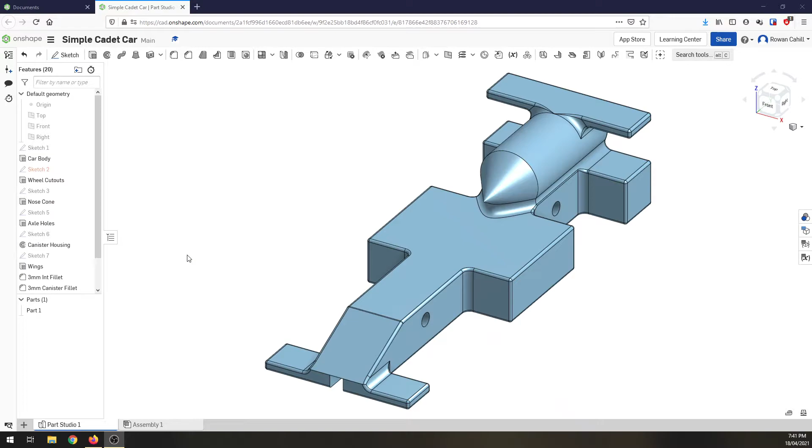So to start, I'm in Onshape, in my F1 in Schools Simple Cadet Car folder, and I'm going to create a new document. Document name, I'm just going to call it Cadet Car. Once it's created, we'll go into our workspace and start creating the car.

Now, with our axes or work planes, we're going to use those and be very careful about which ones we select and when. For this car, I want to start by creating the front profile of the body of the car. So I'm going to click on Sketch and select the front sketch plane.

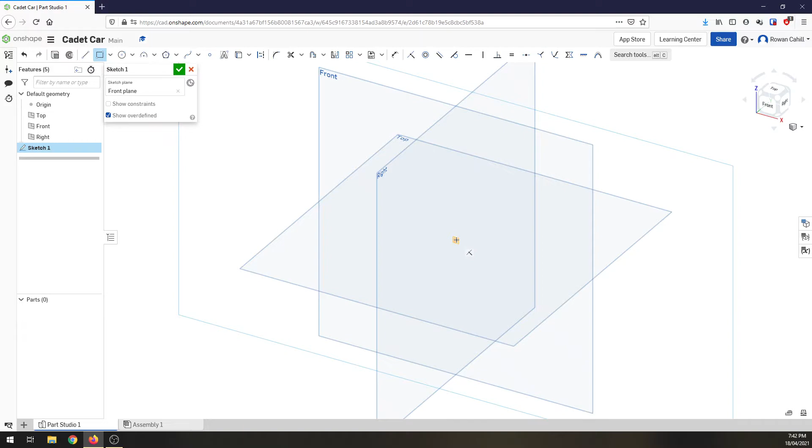To do this, we want to start by drawing a rectangle, and I'm going to wait until my mouse hovers and highlights the origin point of my sketch planes. I'm going to click, come up and to the right hand side, get it about 30 by 20, click, and to dimension it we're going to type in 32.5 along the horizontal and 20 millimeters along the vertical. There's the profile of the body of my car.

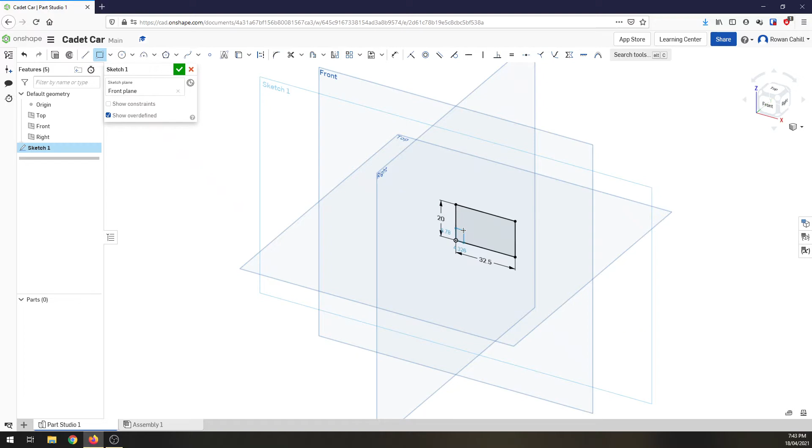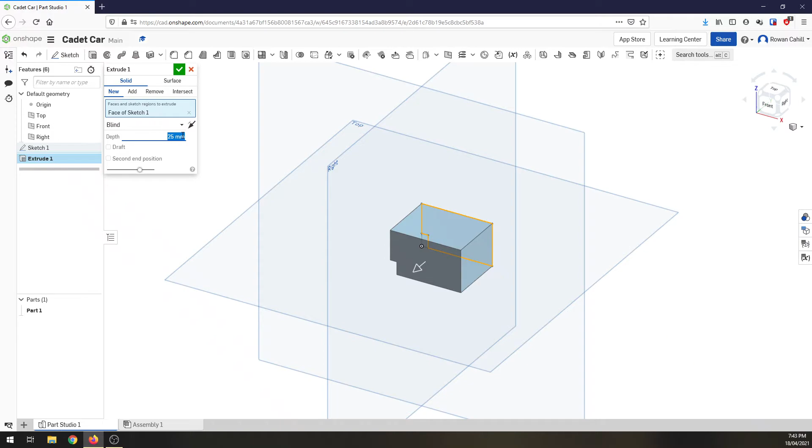I still need to add in the tether line slot. Now I should mention we're working on half the car at a time because we want this car mirrored, so it's got to be the same left and right. So when I create this rectangle for the tether line slot, it's going to be 3 millimeters wide and 6 millimeters high, because once we mirror it, it comes to 6 millimeters. Finish my sketch, and now I'm going to extrude that basic profile. For the length or depth this time, we're going to select 190 millimeters. And there we have the basic body of the car.

Okay, now we've got the basic body. What we're going to do, and this is a great habit to get into, is come over to our features browser on the left hand side. We're going to right click on extrude one, rename it, and call it car body. We're going to name all of the features as we create them, so that in the future if we want to go back and edit it, it's easy to find where the particular feature is that we want to edit. Alright, next one.

We are going to create some cutouts for where the wheels go, on the front. Again, I'm going to come in and hover over until my mouse highlights in the corner. I've created a sketch on this outside plane, and I'm going to come up until it attaches itself to the top edge and click. Down here, I want to type this in as 80 millimeters long. If I've highlighted that top edge, it's already going to say 20, so I'm going to hit enter for that one.

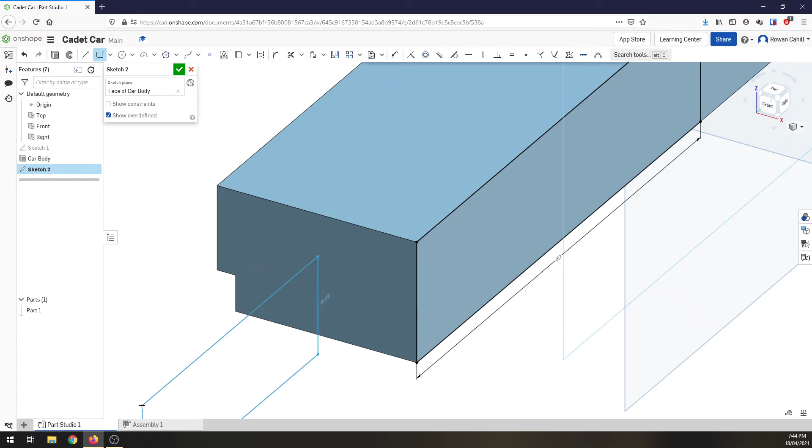Now I'm going to do this again up towards the back of the car. I'm going to select corner rectangle and come in a little bit from the back down till it highlights on the bottom edge. Drag along, doesn't matter. This one's going to be 40 millimeters long, 20 millimeters high. Now we need to add another dimension on this, so I'm going to use my D key to start a dimension, and I want this line to be 20 millimeters from the back edge of the car body. You'll see now that whole rectangle got pushed forwards.

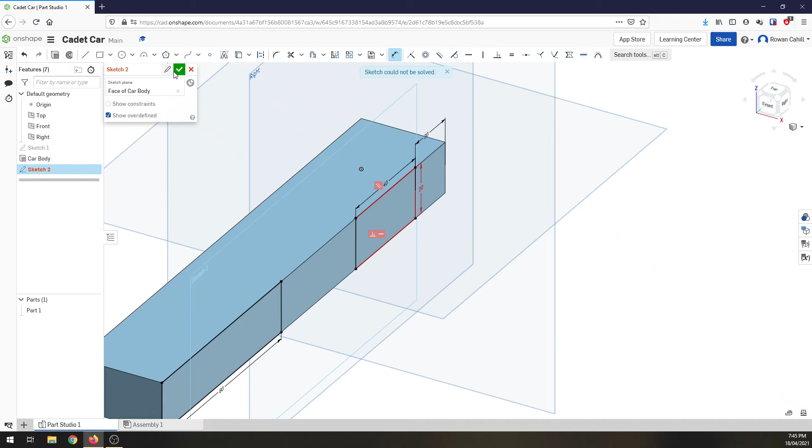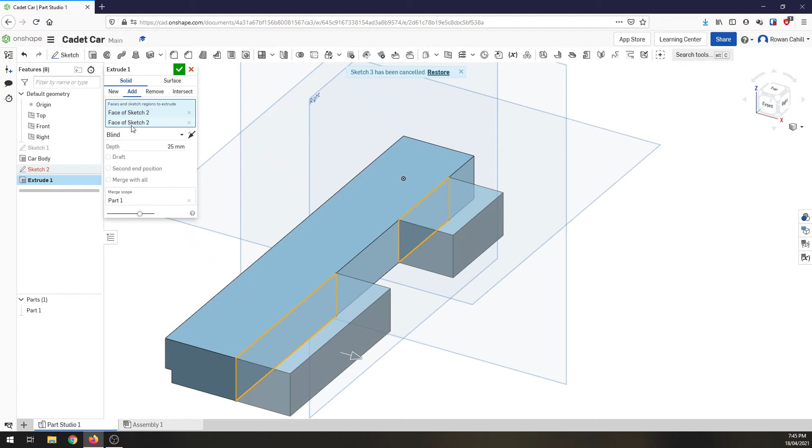I'm going to finish my sketch, and we can now extrude these in to form the cutout. So we want to go extrude, select the front rectangle, the back rectangle. Now you'll notice they're going the wrong way, so in the extrude box we don't want to add anything, we actually want to remove 20 millimeters of material. Click OK, and you notice now we've got these cutouts. Again, come over to our features, right click, rename, and I'm going to call them wheel cutouts. Alright, there's our second major feature being created.

The next feature we want to do, I want to get a nose cone on this. So I'm going to sketch, this time selecting the inside face of the wheel cutout, and I'm going to do a line. I'm going to come a little bit past halfway down the front corner of the car, click, drag up until it reaches that top edge. Again, doesn't really matter where. Front corner, and then back to meet.

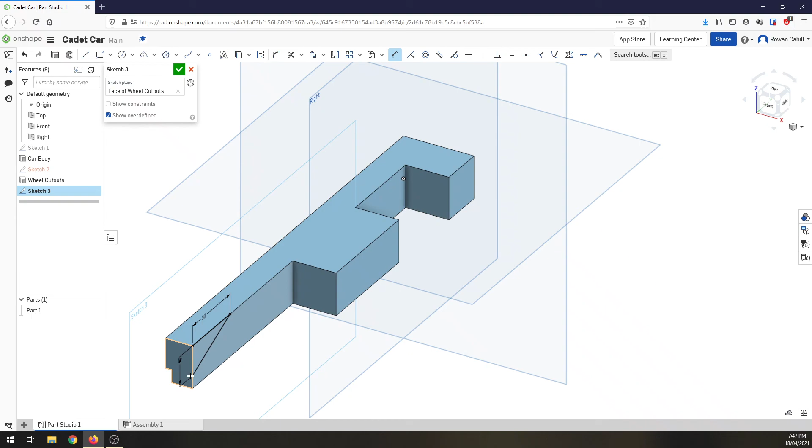And now we've got this triangle. Again, let's use our D key to dimension some of these. I'm going to make this 30 millimeters long, and I want to make this one 20 minus 6, which gives us 14 millimeters, so that's going to line up with my tether line slot. I'm going to finish that, extrude it, click on that face. Again, I want to remove it, removing 25 plus millimeters, which is awesome. And I'm done. Come over here now, rename, and this is my nose cone.

Okay, so now we've got the body of the car finished. I've got my side pod here, I've got the body, I've got a rear pod if you want to call it that, and I've got a nose cone at the front, and that's the initial basics of the car. Next video, we're going to go on and do our axle holes and canister, so keep an eye out for that one. Bye.